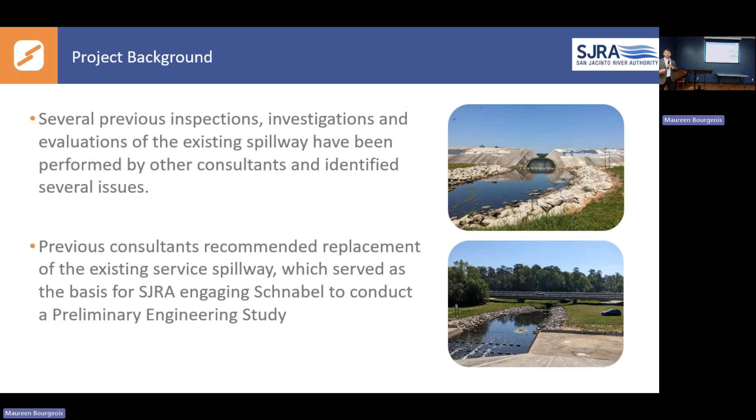So for some project background, there's been several inspections, evaluations, and investigations at the dam site, particularly at the existing spillway over the last couple of years by previous consultants. They recommended, based on their observations, that there were structural deficiencies with the spillway, primarily with the existing service spillway, and they recommended that SJRA replace the service spillway. And that recommendation served as the basis for SJRA selecting Schnabel to move forward with a preliminary engineering study. Next slide, please.

So the scope of our preliminary engineering study is listed on the screen here. One of our initial tasks was to review available project documentation. Schnabel needed to get up to speed on the project, the history, the performance, the design, and so on and so forth. So we did a pretty detailed review of the data that was made available to us.

Also, as one of our early activities, we performed a site reconnaissance to get our engineering team out on site to observe site conditions as they are in the present day. In this case, it was 2024, and just get the lay of the land. As part of that site reconnaissance, we also performed a televised video inspection of the outlet conduit, which had not been performed in some time.

And we had a subconsultant work for us that provided a topographic and bathymetric study of the dam site and an underwater area just immediately upstream of the reservoir. And that would help facilitate our evaluation of alternatives and potentially a future design. We also updated the hydraulic and hydrologic analysis. That too would also serve as the basis for us performing an evaluation of spillway alternatives.

And then we compiled all that information, summarized our results and our recommendations into a preliminary engineering report. That report, signed and sealed, was submitted at the end of last year. And then through the first half of this year, we've been working closely with SJRA to address some of their comments, evaluate some additional alternatives, refine some cost estimates, also perform some coordination with the Army Corps of Engineers, who's providing some funding to this project, and then also prepare for this meeting that we're here this evening.

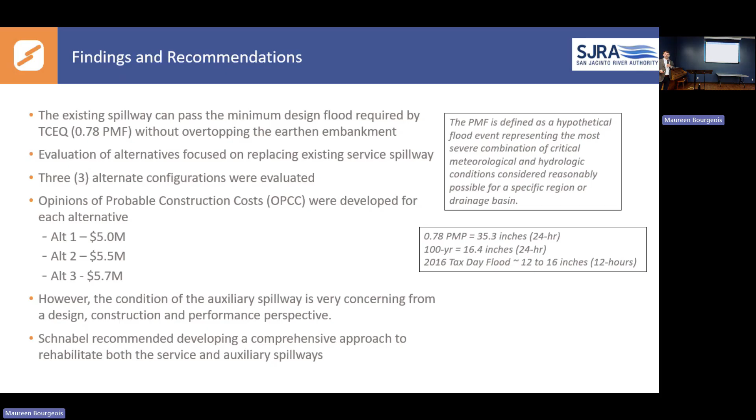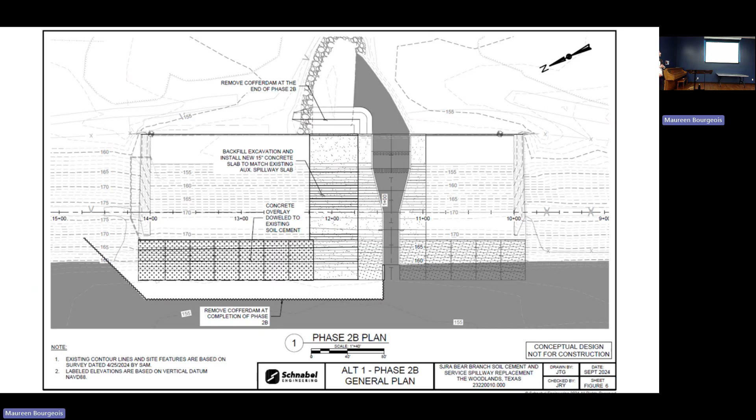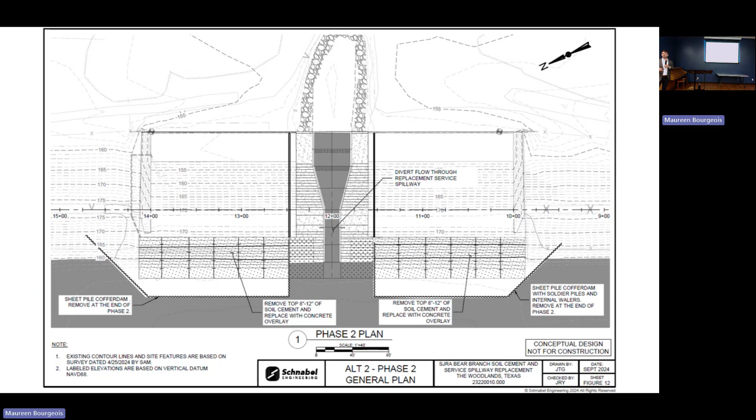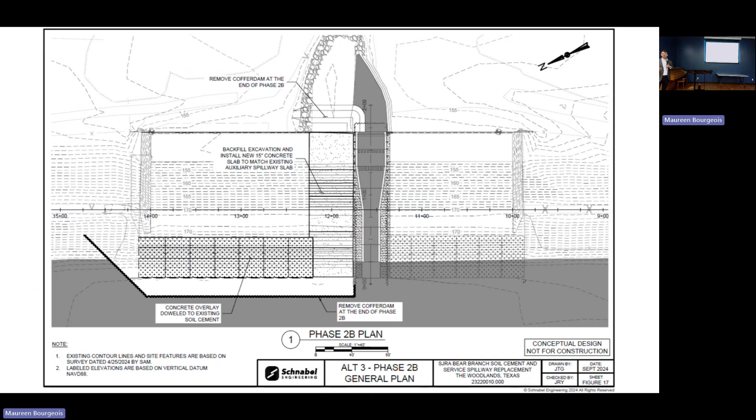but as we're going through it in very detailed engineering analysis, the one thing that stood out to us is that the slab that's constructed over the embankment, which is going to serve as your armoring for your spillway, is relatively thin. It's only 8 inches thick. These slabs need to be designed and constructed in a way that it has enough weight, enough resistance to resist uplift acting underneath the slab to prevent flotation or hydraulic jacking. 8 inches is not enough. Most times we see slabs on the order of 15 to 18 inches.

So the slab is very thin and it's not going to resist uplift in the event that seepage enters through open joints and works its way underneath the slab. So how does water get underneath the slab? It's going to be through joints. So the other concern that we had with regard to the design of the structure is the joint details. They do not include water stops, cutoff walls, dowels, continuous reinforcement, and other features that are going to prevent water from infiltrating into the joint and also keeping those joints tight.

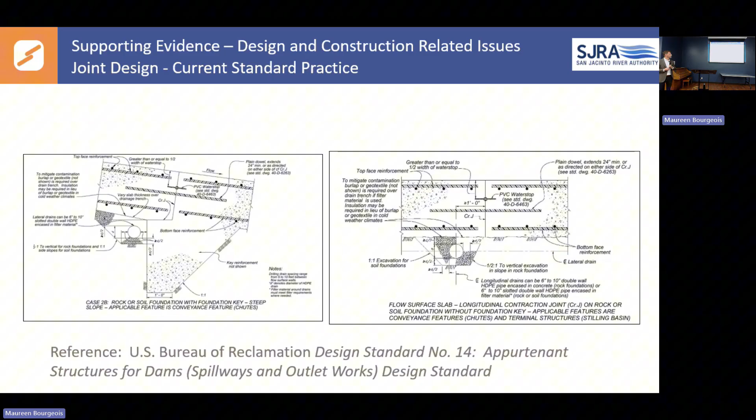For materials like we have here at Bear Branch, the drainage material would typically be some sort of fine sand, like a concrete sand. In this case, it's a very coarse aggregate, almost like a pea gravel. So that's a concern, because we look at dam filters and drains in what we call filter compatibility. The materials need to be compatible with one another.

As seepage is working its way through one medium into another, we don't want it to carry fines with it. So you can imagine if it was an open graded stone with a lot of pore space, it's going to be able to take material out of the embankment and into that stone material. So you're going to be left with voids in the embankment and a clogged drain, which is going to render it useless.

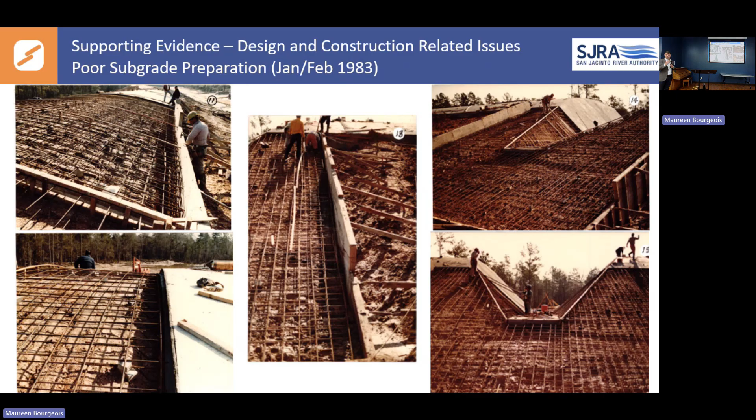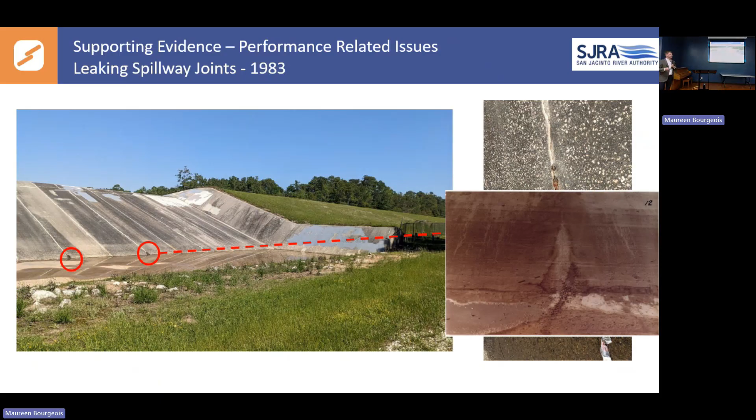So I talked about filter compatibility and drains and migration of material. When we were out there in 2024, we noticed a lot of sediment in the stilling basin. Some of that can be attributed to erosion just downstream, but given the evidence of voids below the slab, poor filter compatibility, and other issues, we suspect that this material is also being migrated from the embankment or below the spillway itself. Next slide.

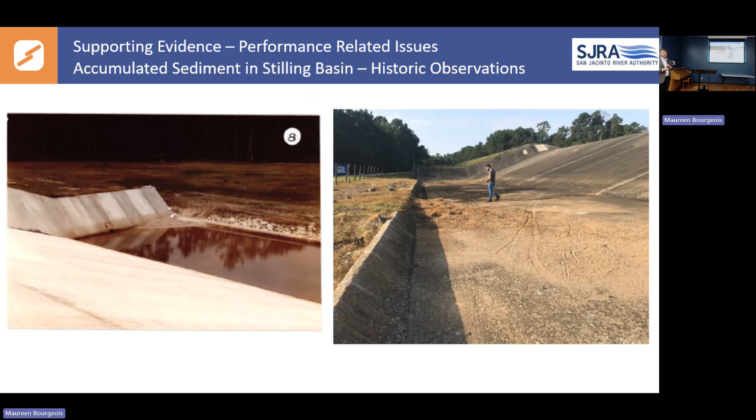And again, this issue has been observed since, this is a photo in 1983, where you have a lot of sediment in the same location. And this is a photo from an inspection in 2021, more recently. So a lot of sediment in the stilling basin is generally not a good sign. It's coming from somewhere, and it's an issue that needs to be dealt with. In fact, the engineer who observed that, I think, said just that this could be a more significant issue that needs to be addressed immediately. And 40 years later, or 50 years later, it's still occurring. Next slide.

Another issue I mentioned, with the potential of fines migrating out of the embankment, out of the foundation, below the spillway and out, there could be voids here, and those slabs could settle. During our inspection in 2024, it was a dry period of year. It hadn't rained for several weeks. However, there was water ponding in the left and right sides of the spillway. So those areas appeared to have settled.

There was a survey performed, I want to say 2019, 2020 or so, where the surveyor did pick up that the slabs in these areas have settled a few tenths, where the middle of the spillway is not. So just further evidence that there's potential voids below the slab and things are settling. Next slide, please.

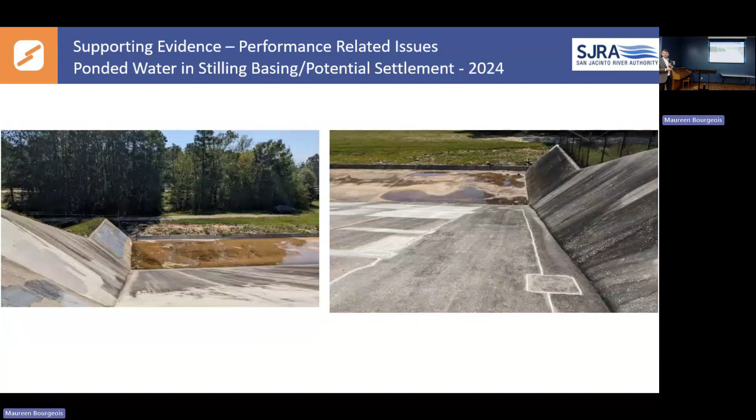So let's go into some performance-related issues. Just want to note that SJRA assumed responsibility of the dam in the late 90s. Since then, they've embarked on at least 2 repair efforts to address the joint sealant between the late 90s and 2013, when I start my timeline. So they've been a pretty proactive owner and have been repeatedly addressing the joint sealant issue over time.

In 2013, 2014, there was an effort to grout open spillway joints at the junction of the service spillway and the auxiliary spillway. The joints were also recaulked, and concrete spalls or damages at those joints were also repaired. And then just 7 years later, 2 other voids were identified at that same joint location. The contractor pumped 6 to 9 cubic yards, basically a concrete truck worth of grout below the spillway. So pretty significant volume, right?

However, what they noted was that the grout exited open joints. Again, further substantiating that the joints here are open and material is able to flow in and out. And they also noted that the grouting program was relatively unsuccessful. So despite pumping all that grout, there were still voids up to 2.5 feet below the spillway.

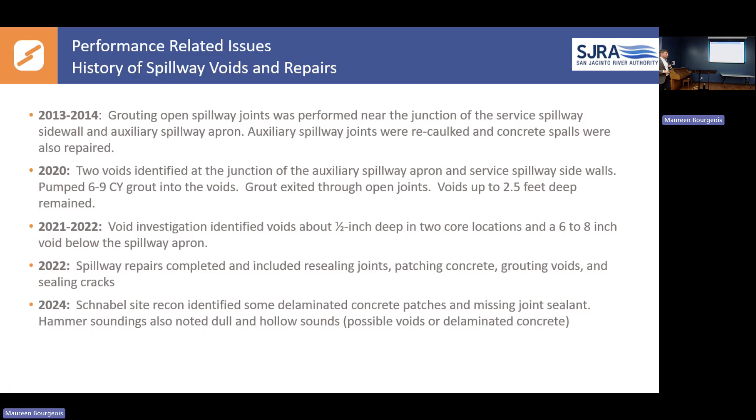So in conclusion, this is actually a quote from our report and possibly our memo that we submitted last week. But essentially, Schnabel's of the opinion that significant dam safety issues do exist at the dam. And if left unaddressed, they're going to result in continued deterioration of the spillway, leading to a progressive failure of the spillway and an uncontrolled release of the reservoir.

So we're recommending that a more comprehensive approach be taken to both the service spillway and the auxiliary spillway, and that SJRA embark on that immediately. And again, I just want to key on that: rehabilitating only the service spillway is not going to address similar issues that also exist with the auxiliary spillway.

However, we understand funding and timing is always difficult. So we just want to note that, if for some reason construction needs to be prolonged more than maybe 5 years, that SJRA continue implementing these interim risk reduction measures.

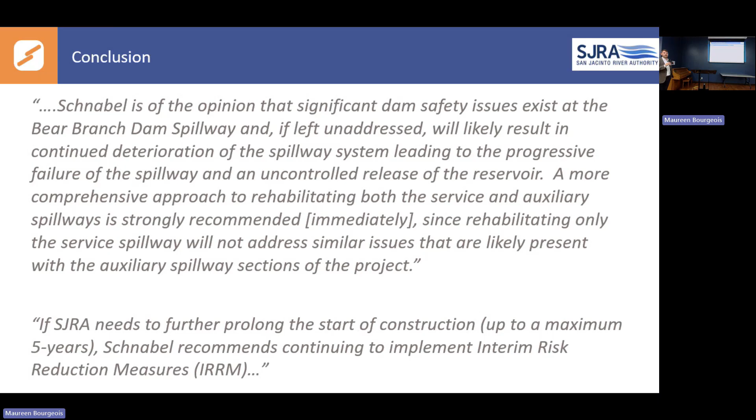Next slide. So I guess the last thing we'll close on is project costs. And I want to hand this over to Ed Shackelford with SJRA.

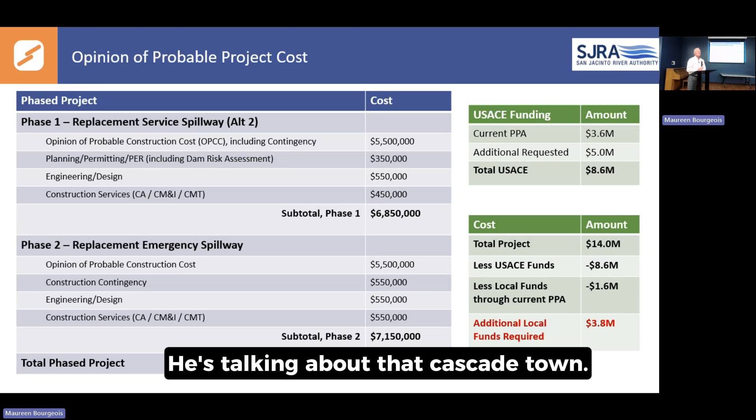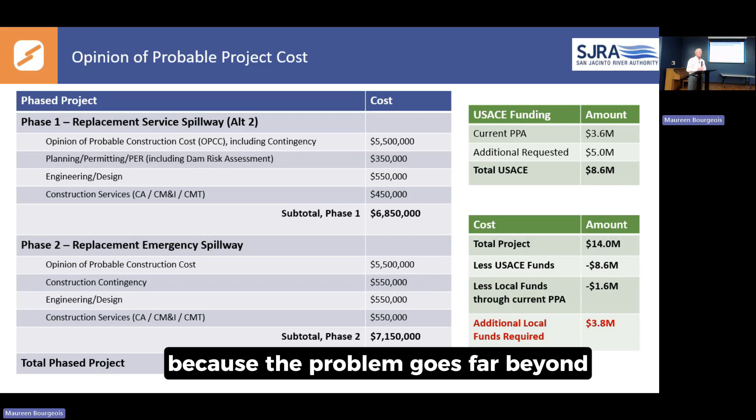You know, if you look around this room, a lot of us have been here. So a lot of us don't understand probably how this structure, Bear Branch support structure, was created. If I listen to the engineer, he's talking about a dam area that cascades down, like Willis Dam, cascading forward. I even look at this and say, we have 5 MUDs here today. It shouldn't be 8%. Because the problem goes far beyond maintaining the dam structure. We're talking about how to rebuild the structure.

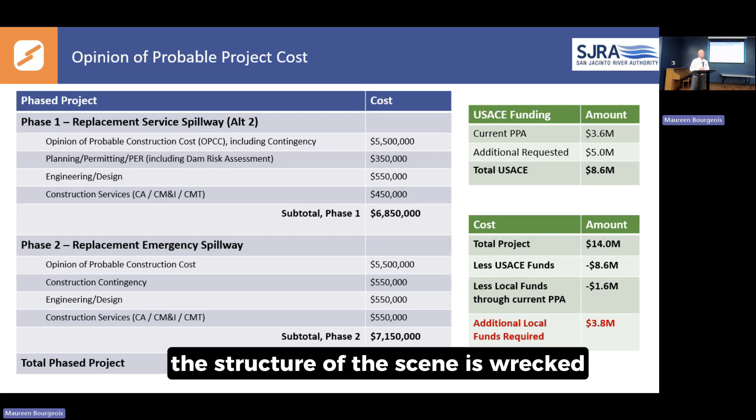I can tell you what it's based on currently, and then I may have to call on Jim or Eric to help me. But there's a certain drainage area in the 5 MUDs that fund the maintenance of Bear Branch, the dam and the service area on Bear, Panther, and Alden Branch. And each MUD has a different pro rata share based on SFDUEs for the area that drains to Bear Branch or Panther or Alden. And I understood that. Okay. And I don't have the percentages memorized. Correct.

I can speak loud enough. I was just curious, Congressman Crenshaw's office, what kind of commitment do we have from them? Well, right now, the 5 million is in an environment and water bill, a piece of legislation. So the 5 million is in there and it's earmarked for this project. It all depends on Congress approving the budget at the end of the year. So far, up till now, they have. I can't guarantee that the budget will be approved. Then if you decide to go forward with phase 2, the rest of the cost is borne locally.

So could we go back one more slide? Actually, back a few more. I don't know. There, keep going to the beginning. Going towards the end. Yeah. Go back towards the beginning. Yeah.

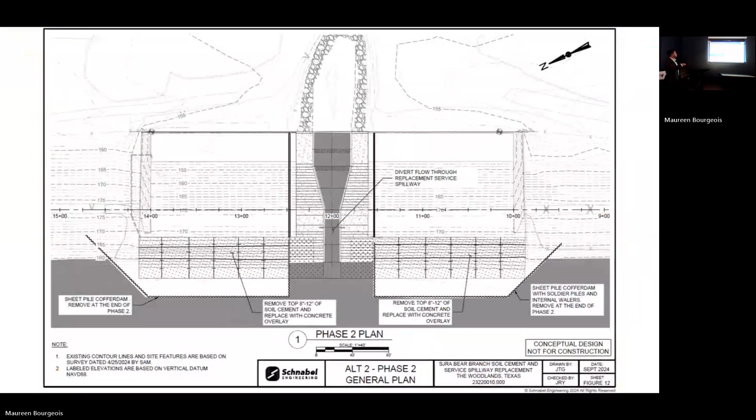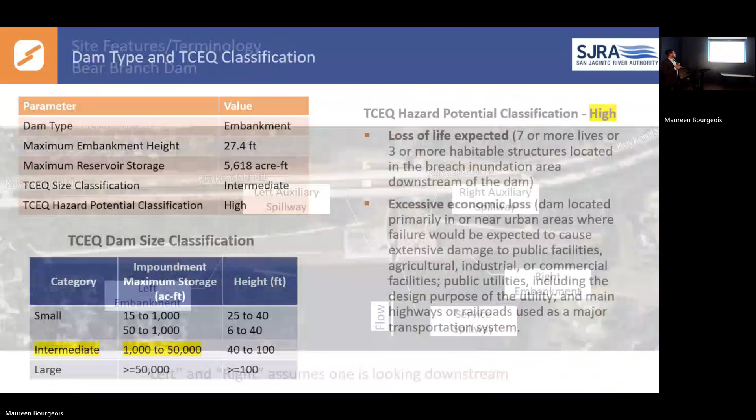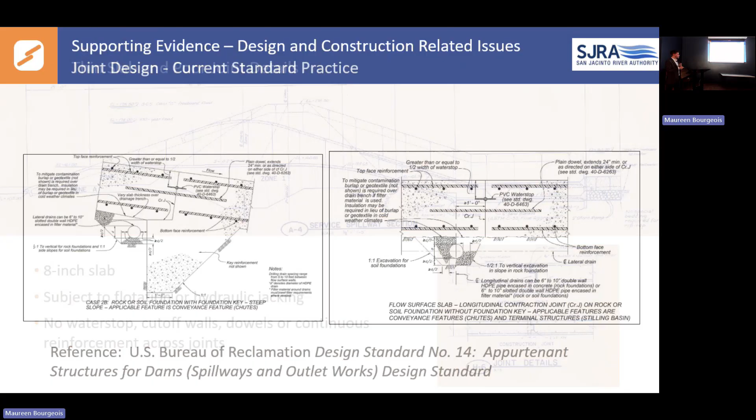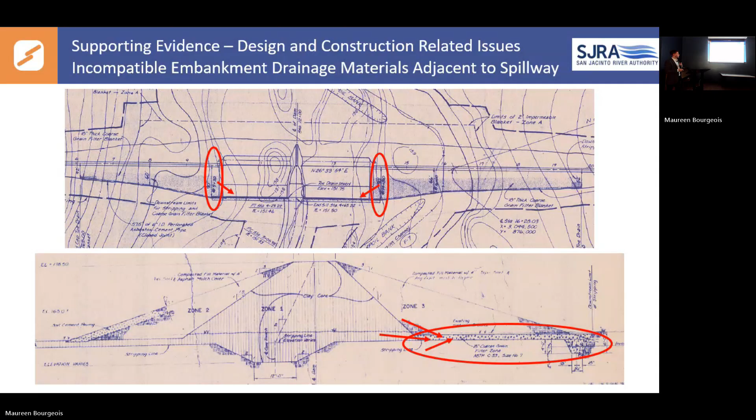Here's the control. Okay. Are those the joints? Yeah, so those are the joints. All right. I think I understand the joints are the way the slabs are connected on the face, right? Yeah, exactly. And there's a figure all the way at the end.

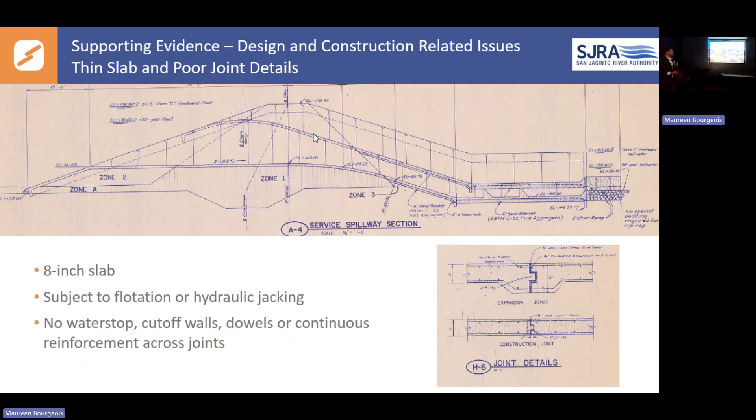Could we go to that? Yeah, just scroll up through there. Keep going, keep going. Yeah, this one right here. Double click on it. Okay. I got a figure that I think will help orient where all these joints are. No. One more. One more. There we go.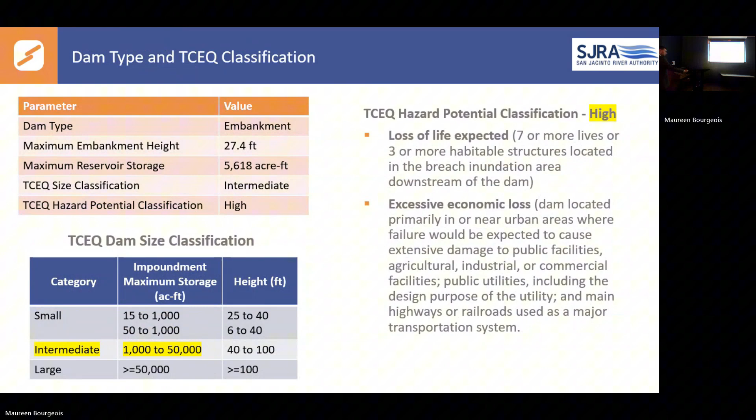Yeah. Why is that yellow line? This yellow line represents the limits of floodwaters in the event that this dam would fail during the design storm, 78% of the PMF. Did you also model the 100-year flood and the 500-year flood? Because what I'm interested in is knowing the percentage breakdowns of economic loss by infrastructure type.

Schnabel did not. This was an analysis performed by another consultant to support development of the emergency action plan. So from what I know in that report, they modeled a sunny day breach, if the dam were to fail on a sunny day with dry weather, or the full design storm. I'm not aware that any interim storm events were modeled like you suggested.

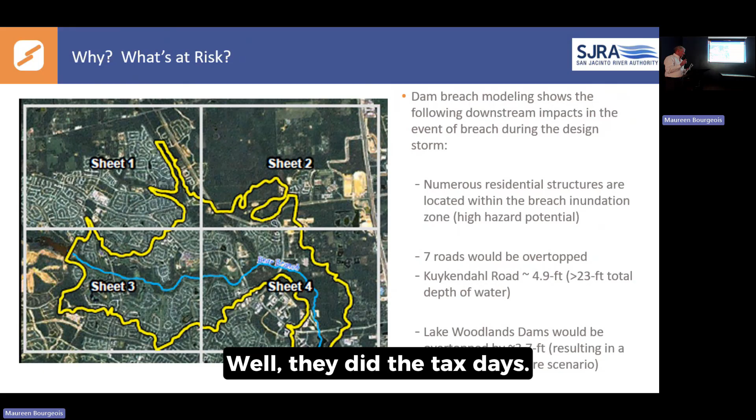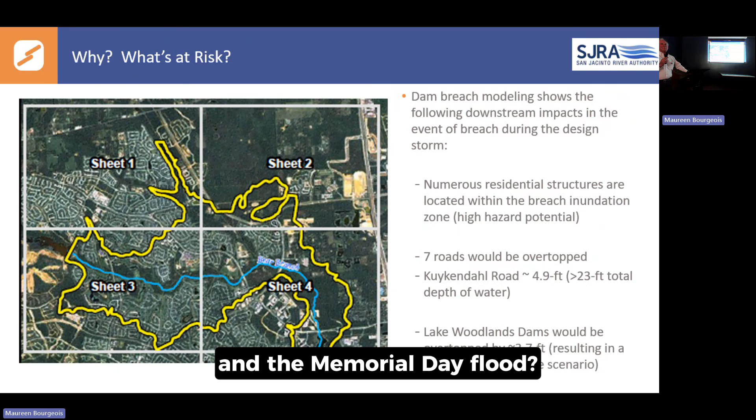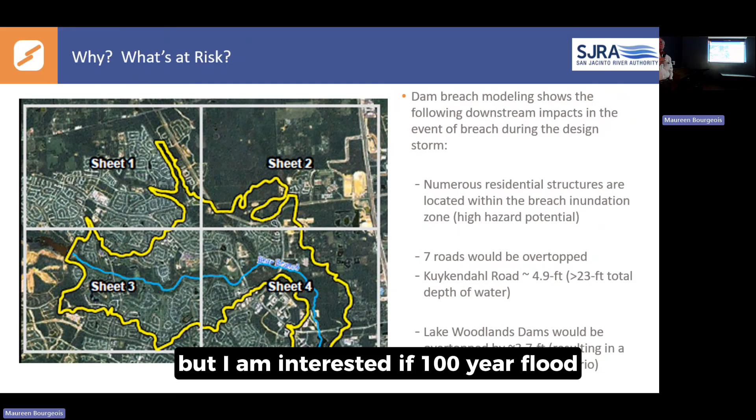Well, obviously, that's the thing of breaching on a sunny day, but I would like to see that because I know there's a lot of golf courses. I'm not trying to make light of what happened, but I am interested if in a 100-year flood there were only X number of FEMA claims. And yes, those things are very real. I worked on FEMA plans mostly in Cruz's office. But I'm interested to see what the overlay is with these floods. Let me see if there's a way we can do that. That's not in their current scope.

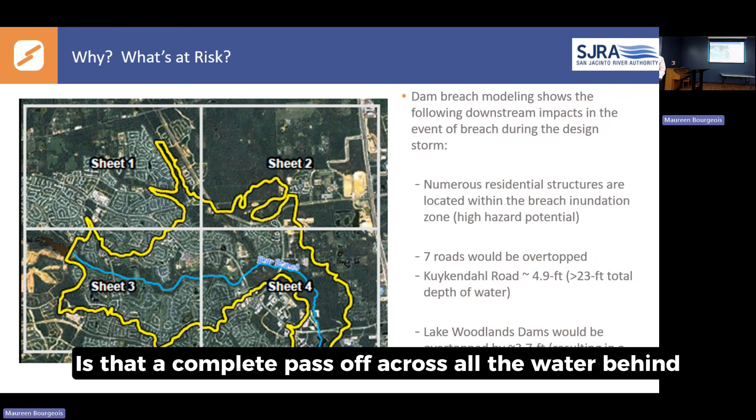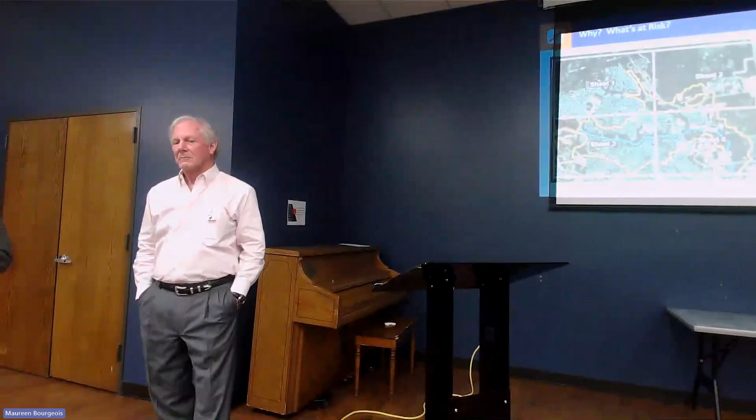I believe you had a question? Yeah, a good presentation and a pretty good question as well. Kind of related to the breach, is that a complete catastrophic loss? All of the water behind that dam goes downstream? That's what we're modeling. Yeah, that's right. I saw the pictures of that. That was all that water, the whole spillway was washed. Is that what you're saying? We don't have a photo of a dam breach in action illustrating the release of water, but we have some photos in the back of the slides of spillways that were constructed similarly to Bear Branch that suffered damage.

But Jimmy, it's not during the breach, right? But the breach opening, I forget, it would be full height, 20 foot high, 27 foot high. And I think it's maybe as wide as 3 times the height. So maybe another 75, 80 feet wide hole through the dam that's allowing the water to release. I haven't gone through the previous consultant's analysis, but ordinarily it would take half an hour or an hour for that breach to form, and then it would release the entire storage volume that's behind the dam through that opening hydraulically. Yeah.

Lake Woodlands Dam, built the same way? I'm not familiar with the design and construction. Ed, my understanding is when you look at it, drive over it on Woodlands Parkway, they're not the same design. The sediment you've got is going away. Can you analyze that sediment to know if it's actually from underneath the dam or it's actually sediment in there? That has not been done. That makes sense. Yeah, it's a good question. I suppose we could run grain size analysis and maybe see if it was the aggregate, the drain fill, and compare it to other materials that we have on site.

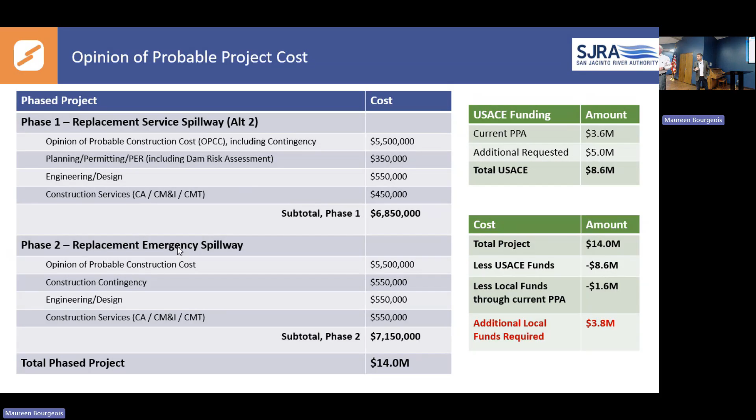What I heard? Tax Day flood, LJ. Yeah, I haven't seen them run a dam failure model on it. Oh, yeah, okay, I thought that's what you said earlier. I said the Bear Branch drainage project that you've seen was based on the Tax Day flood. It wasn't a dam failure. No, I haven't seen that. Okay, so this is pretty significant.

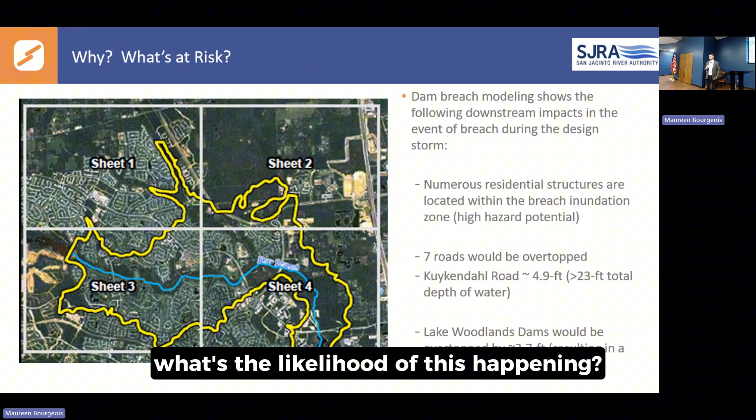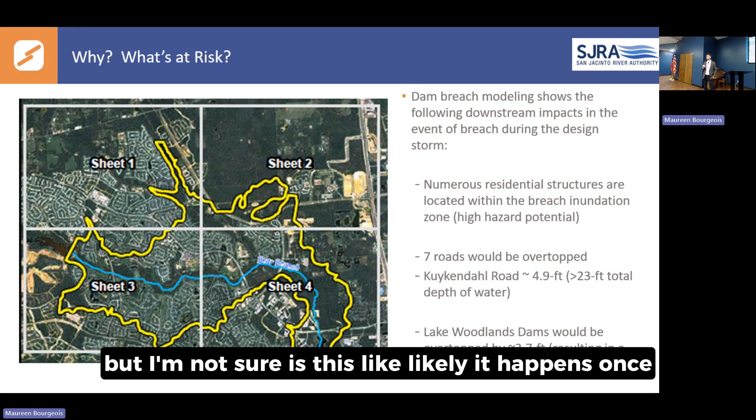What I'm concerned about is the messaging that goes with this. What's the likelihood of this happening? And can you give us some probabilities? And should we take immediate action to mitigate this by draining the reservoir? And you've heard from others what this would impact in the community. But I'm not sure, is this like it happens once in 1,000 years? Or is this something that we ought to be worried about happening the next time there's a hurricane?

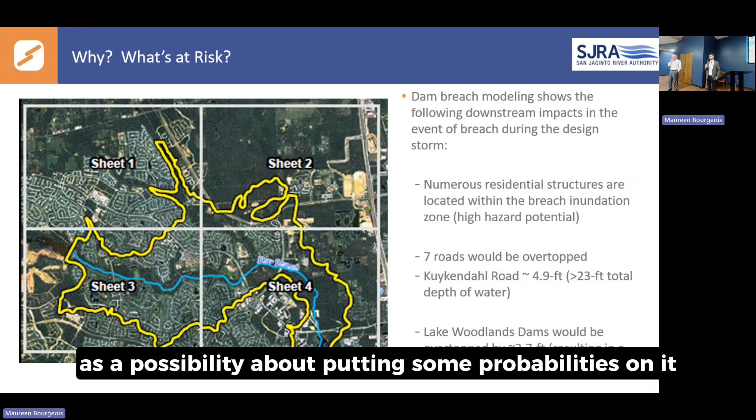So I think we owe it to our citizens to put some context in this. Putting this slide around as a possibility, without putting some probabilities on it, could lead to some concern that maybe isn't warranted. But if it is warranted, it's our responsibility to take immediate mitigation steps. So I think we need guidance from you guys on how we proceed.

So the probable maximum flood or probable maximum precipitation, as an industry, we don't assign an annual exceedance probability to them. It's not like you can go to NOAA Atlas 14 and pick off 100-year rainfall or 500-year rainfall. That said, the probability of PMFs are what, Jimmy, on the order of thousands of years? So a pretty extreme event. It doesn't mean it's only going to occur once in 1,000 years. It just means it has a low percentage of occurring in any given year.

And it could be an event smaller, much smaller than the PMF that could cause a spillway to crack and a failure. So it's not necessarily the PMF that's the issue. From a compliance standpoint, the spillway is not structurally sound to pass the design storm, but there's a risk that it could become damaged or fail for a much smaller event. We recommend moving forward with a comprehensive rehabilitation immediately. Draining it, we have not discussed that.

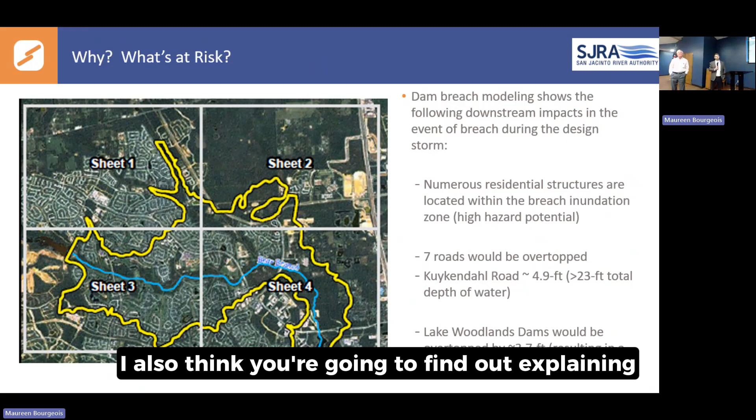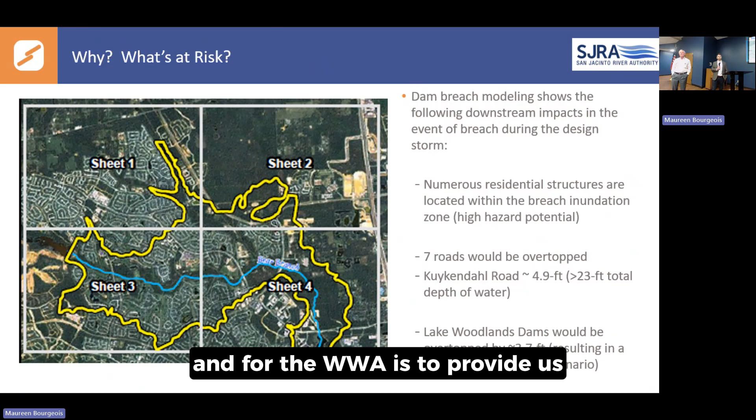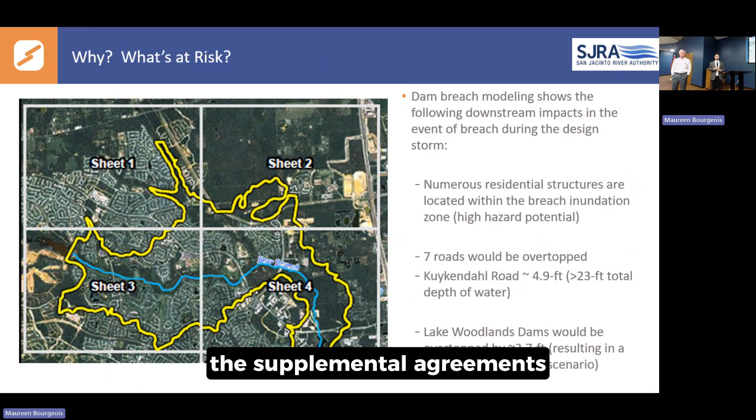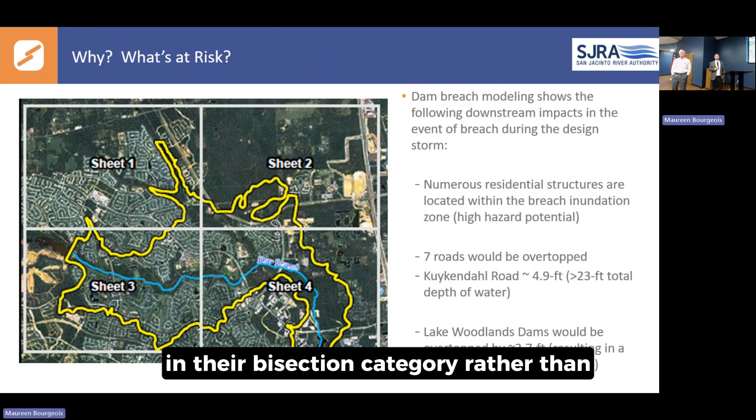Fred? This was the question I was asking earlier about risk assessment. And I think that's critical. I also think you've done a fine job in explaining what the worst case scenario is. And I think that the next step for the SJRA and for the WWA is to provide us with a financial model, because bonds, and I wrote this up in my SWB report, the supplemental agreements that we have with the SJRA, in my opinion, are not for the betterment or the best interest of our constituents. And it's all detailed there by section category. Rather than argue that issue, I suggest picking up the model.

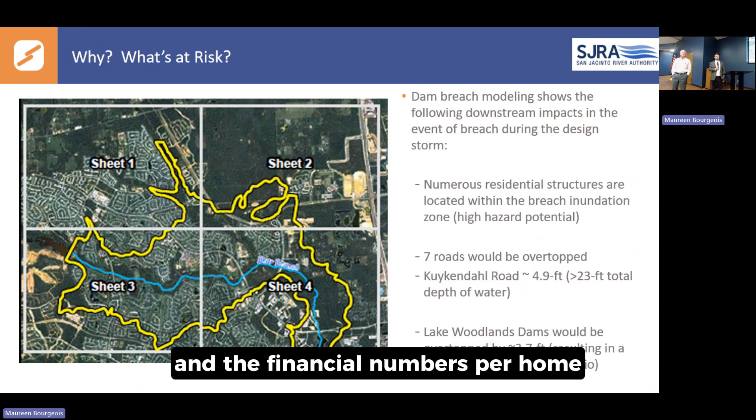I did some quick back of the envelope analyses, and the financial numbers per home, per commercial property, per resident, retail, come out to a fairly doable number. For an estimate of 16 million, I used a little higher number, only for one reason. I think that's the next step. We heard your report. Other people here have already requested additional information, different analyses. I think the next step would be to take a look at the financial model, because I don't think bonds are in the best interest, given supplemental agreements, of our constituents, and I would stand firm on that. So with that, you and Ed can comment on the financial model. It's a service that your company provides.

Not in the terms that you're speaking, right, Jimmy? I mean, for risk analysis, usually we look at life loss for dam consequences. There could be economic losses that we could look at, but ordinarily life loss is what's going to drive dam safety projects, right, Jimmy? Yeah.